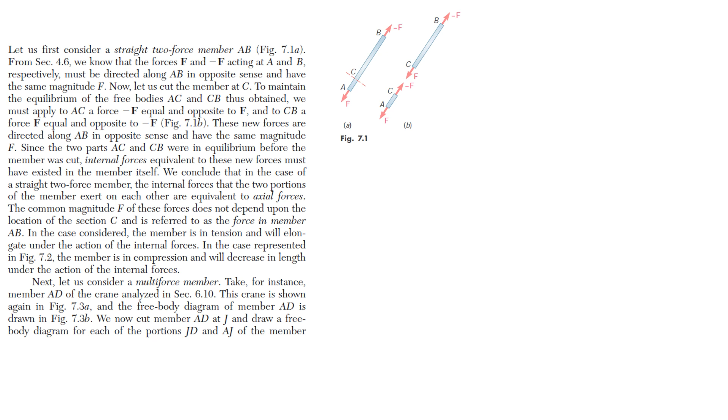As I said, we encountered internal forces in truss. If you remember, in figure 7.1 and 7.2, we encountered internal forces there. In trusses, when we cut, like in method of sections, the internal force we consider is just the axial force, meaning along the member. But technically speaking, all bodies or structures, if we get the internal forces, there are three that it feels.

Again, for internal forces, why do we get it? So we can know each part of the body what it feels. Because if you encounter another force, each force the body has, the shear force, normal force, and moment it feels will change. So that's the purpose of getting internal forces.

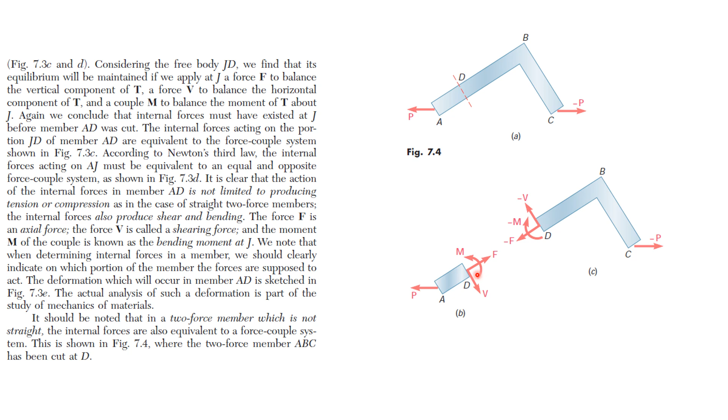So here you see, we have F, and on the other side negative F. You'll notice that when you cut, for example this in figure A, we cut it. Either way, left or right, you can consider it to get the internal forces, no problem with that. When it comes to shear, normal force, and moment, we just assume the direction. Depending on where you assume, no problem, just remember that whatever the other side is, it's negative or opposite direction. So you'll notice there, negative F, negative M, and negative V.

So the notation is: V is shear, M is moment, and F is normal force, or N can also be used, depending on our reference.

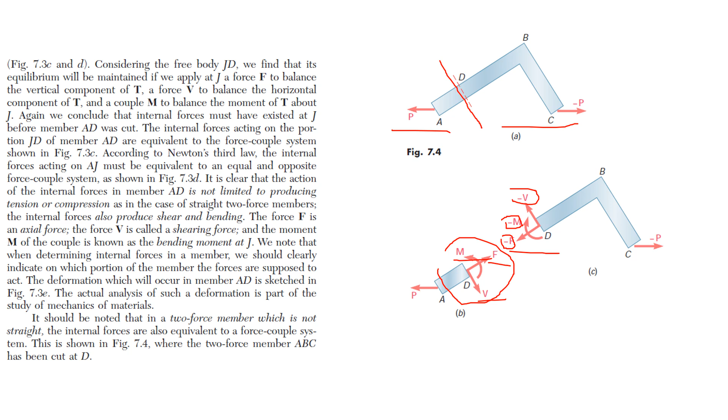So here, let's start with beams. Shear, bending, and shear bending moment diagrams. In beams, that's where we consider the shear and moment diagram.

In beams, we remember there are many types of loading and types of support that beams can have. Why do we need to know that? Of course, the external forces affect the shear and moment that the beam feels internally.

Typically, beams are long, straight, prismatic bars. And why do we need to know the loads felt internally? We need to identify the shear forces and bending moment created by the loads, and choose the cross-section ideally suited to withstand the shear forces and bending decided in the first part. That's so we know in which part the largest shear and largest bending moment the beam feels.

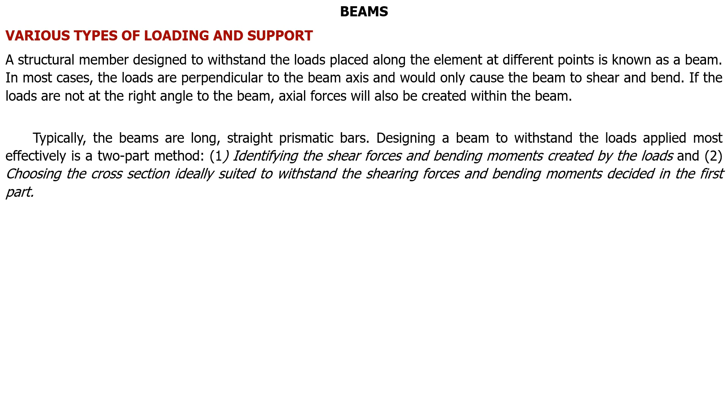So here, we have a figure. As I said, there are various loads felt, which are concentrated loads and distributed loads. They're different when it comes to shear and moment, and shear moment diagrams, because we don't simply treat distributed loads as concentrated. The effect of concentrated loads is different from distributed loads.

If it's a concentrated load, it's easier to work with because it mostly affects just the shear. But for shear and moment, when it comes to concentrated loads, it's fairly easier to understand what answer you'll get, and it's easier to grasp compared to distributed loads.

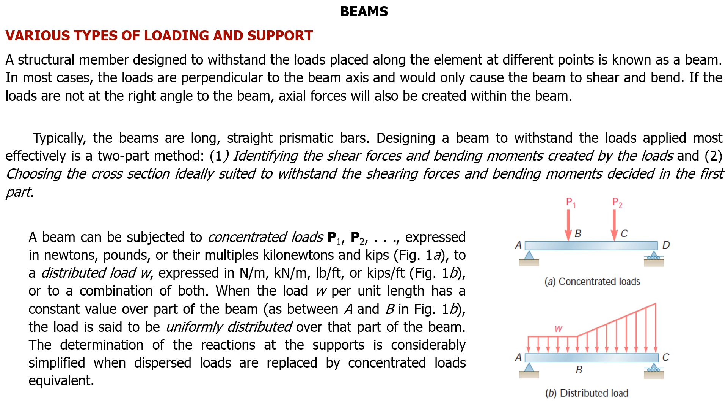And of course, distributed loads, there are many types. We have uniformly distributed, uniformly varying loads, and varying loads. Concentrated loads' units are expressed just as forces or loads, such as newtons, pounds, kilonewtons, kips. Then for distributed loads, they're a function of distance. This is important because when it's distributed loads, being a function of distance creates a large effect on our shear and moment.

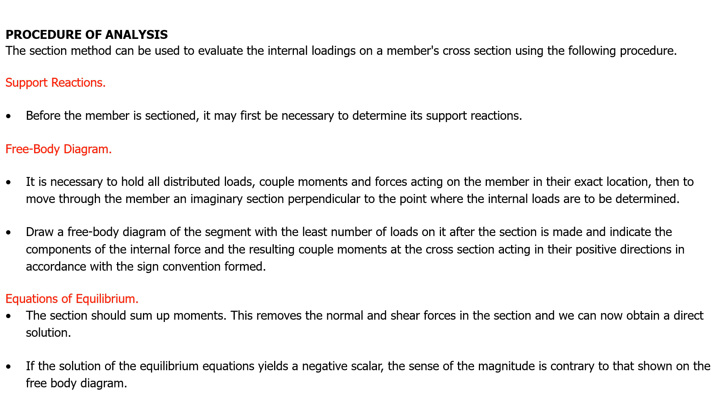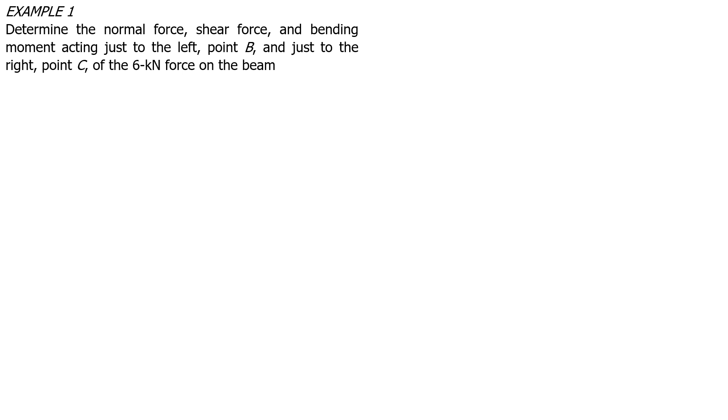So, determine the normal force, shear force, and bending moment acting just left, point B, and just right, point C of the 6 kilonewton force on the beam.

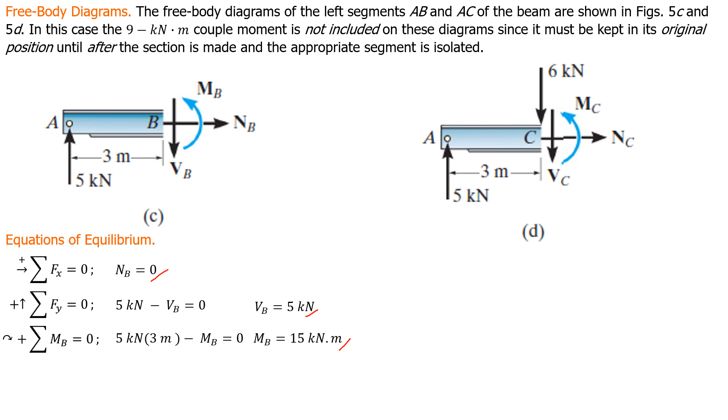Okay? So, we have here summation forces X, di naman magbabago. So, NC is equal to 0. Summation forces Y is equal to 0. We have here, of course, yung 5 kilonewtons na pataas. Then, pababang 6 kilonewtons. And, of course, yung VC na hinahanap natin. So, we have a VC na negative 1. Then, summation moment tayo kay point C. 5 kilonewtons times 3 minus MC.

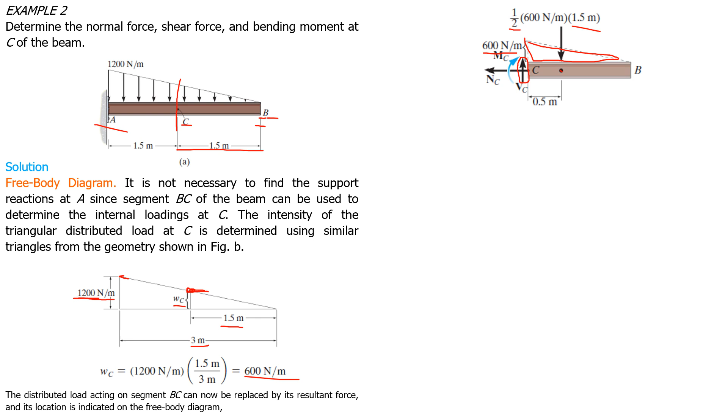Okay? So in this case, dahil triangular tayo, triangular yan, 1/2 BH. Diba? Or 1/2 base times height. Whereas 1/2, tapos ito yung base, ito yung height. Okay? Then of course, yung pwesto ng ating concentrated load is of course 1/3 from the thick base. So from the thicker part. So kaya tayo nagkaroon ng 1.5. So unahin natin summation forces X kasi may NC pa rin hinahanap. 0 naman, as is, kasi wala naman tayong forces along horizontal. Then summation forces Y, we would have yung VC na pataas. Then of course yung pababa na 1/2 times 600 Newton per meter times 1.5. So, makukuha naman natin agad si VC. We would have a VC na 450.

Then, of course, summation moment at point C. Kasi doon tayo nag-cut, as I said. We would have yung MC natin, then 1/2, okay, 1/2 height times base as always, and of course, yung distance, perpendicular distance natin is yung 0.5.

Okay, so this would be MC, sorry, MC yan. Typo again. So magkakaroon tayo ng negative 225 kN meter. And of course, kung negative yan, ibig sabihin naka counterclockwise po dapat. Ayun.

So far guys, karamihan ng ginawa natin is the equation method. Ibig sabihin, gagamit tayo ng summation forces to get the equations or yung values na meron yung shear and bending moment. So in a way, hindi man naging equation yung hinahanap natin, this is also known as the equation method. Magagamit nyo po kasi talaga yung equation method once na medyo marami na yung forces na ikina-consider. So mamaya we have a sample for that para mas maintindihan natin yung equation method.

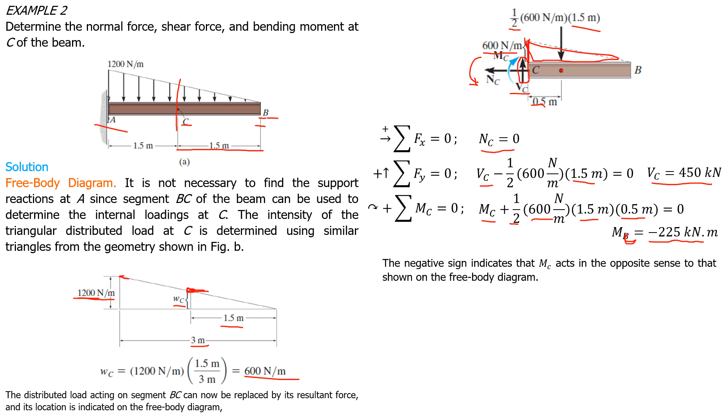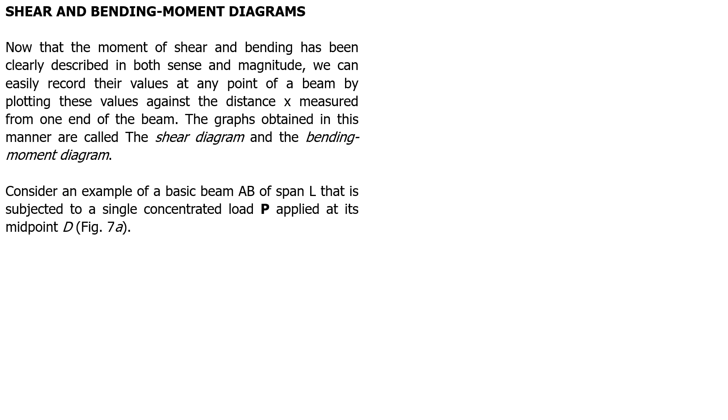So again, dito na tayo sa shear and bending moment diagrams. So dahil we are considering na yung diagrams, madalas nating gagawin is if we have a body, so simply supported lang to. And meron siyang force sa gitna. Diba? In-indicate naman na L over 2 yung distance from left and right. So, ibig sabihin, nasa gitna na si P.

Ngayon, si P natin, dun lang ba gagaling? Yun na yung external load natin eh. So, of course, dun lang gagaling yung reactions natin at point A and point B. Okay? If you can see, dinisregard naman na yung horizontal force sa A natin. Minsan kasi meron talagang force sa reference na tinatanggal na kasi zero naman.

And of course, sa beams is shear nga. Shear yung ating iniintindi, kaya minsan hindi na sinasama. Okay? If ever pinapahanap, please include yung ating forces along horizontal or along X. Nagkataon lang talaga sa reference na to is hindi siya sinama. So going back, dahil nasa gitna lang si P, mag-equalize lang si RA and RB. Paghahatian lang nila si P. Ganun lang yung idea.

Kasi we just want you to understand na kapag sa shear and bending moments, every moment or every force na meron tayo, magka-cut tayo. Bakit? Kasi sa shear and bending moment diagram, each moment and each force ay makaka-affect sa diagram natin. So each point na meron tayong introduced force or moment, magka-cut tayo. So in this case, nag-cut siya sa point C and point E. Pwede kang from A, kasi ito yung first force, kaya siya nag-cut sa C. Then after nung P, nag-cut siya sa E.

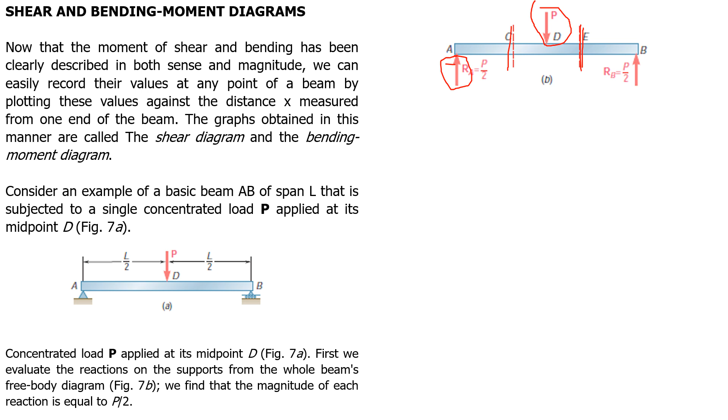So, pwede rin naman galing ka kay B. Walang problema yan, ganun din naman yung essence. Galing ka kay B, so kinat mo sa E. Tapos after ni E, si C kasi meron kang force kay D. Di ba? So, from left to right or right to left, walang problema yun.

So, as we remember, pagka-cut natin, in this case from A siya nag-cut, so at point A, dun siya may RA. So, kinat niya kay point C, of course, kukunin mo si shear and si moment. Kasi yun naman yung pinapahanap natin, shear and bending moment diagram. So, ang gagamitin mo lang sa equation is yung shear and bending moment. Kaya minsan, hindi na sinasama si normal force.

So, mapapansin nyo, kapag sa shear natin, ito lang siya, yung body lang muna na to. Binura ko muna. So, yung first part lang ng body, yung AC lang. Yung AC lang yung sinasabi dito, which is magkakaroon siya ng shear na positive. Okay? I think this should be negative. Kasi AC yung kinonsider niya eh. So this should be negative.

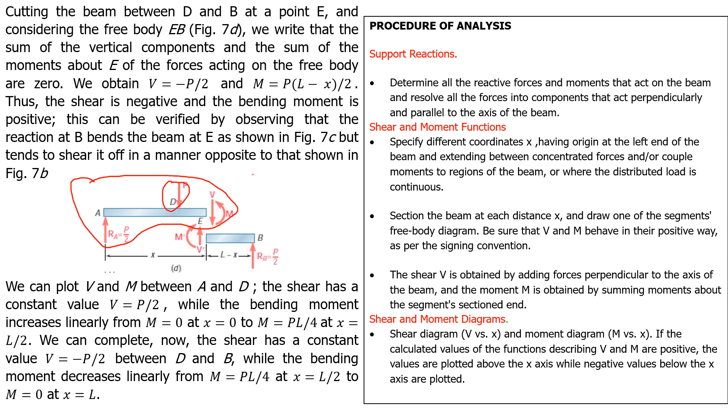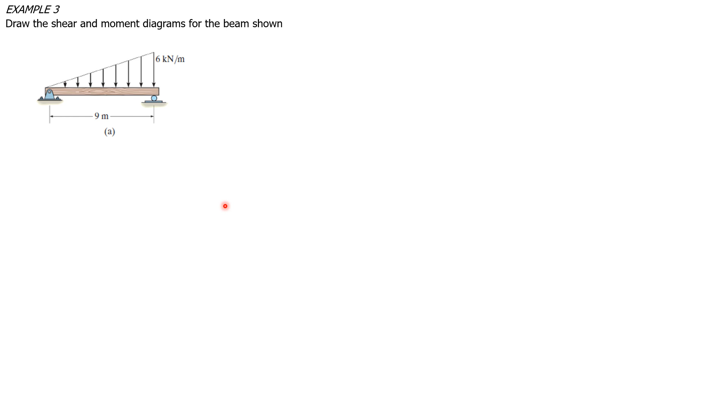So, we have here example number 3. Draw the shear and moment diagrams for the beam shown. So, we have a beam here. Okay, so may beam tayo na may uniformly varying load, which is 6 kN per meter, and 9 meters tayong distance for the beam.

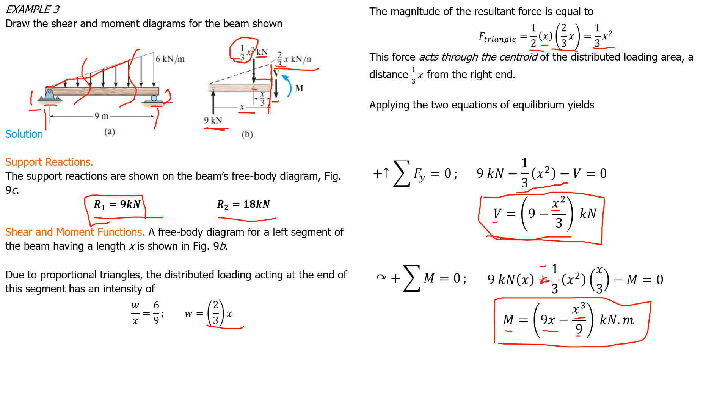Let's plot equations 1 and 2 that we got earlier. So at point A, at point 0 for example, this is the shear diagram, this is your shear equation. When you put 0 in for x, at this point, you will get a shear of 9.

That's correct. Then when you put in a value of 9 - since 9 is the overall length - when you put 9 in for x, you will have a negative 18.

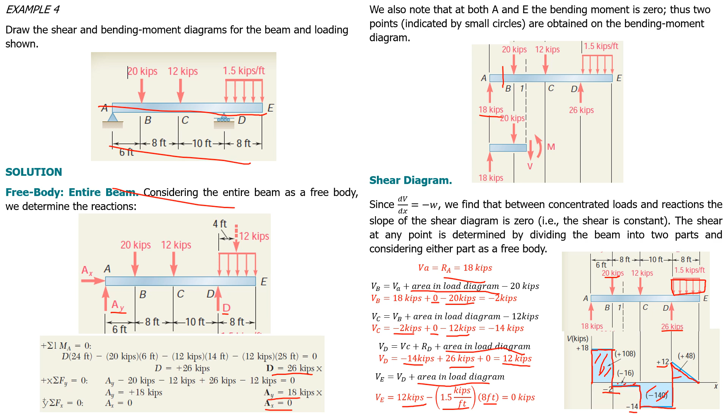Okay, area nga, area ng shear diagram. Galing ka ng 0, dahil meron kang reaction, as I said kanina, kung saan ka may reaction, mag-0 yung moment mo. So in this case, kay point A, meron tayong 0.

Then as I said kanina, area nito, meron kang 18 times 6, ito siya, 18 times 6 yung length na to. Magkakaroon kang 108, ibig sabihin from 0, papupunta kay 108, iko-connect mo lang talaga siya. Kung ito ay horizontal, magiging linear yung moment mo, mapapansin mo ganun yung trend niya.

Tapos ito, negative 16. Bakit negative 16? Nasa baba po kasi siya. So negative 2 times 8 yun siya. Mahalagang malaman mo kung nasaan siya ng posisyon ng shear diagram, kaya siya negative 16. Ibig sabihin, yung positive mong 108, babawasan mo ngayon ng negative 16, kaya ka nagkaroon ng 92.

Okay, then ganun ulit, yung idea, negative 140, saan nanggaling? 14, negative 14 times 10 na length. So 92, magmaminus ka ngayon ng negative 140, kaya ka nagkaroon ng negative 48.